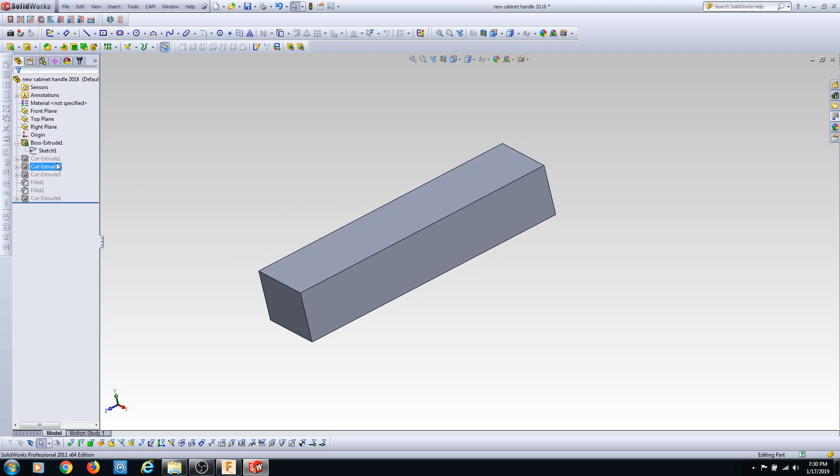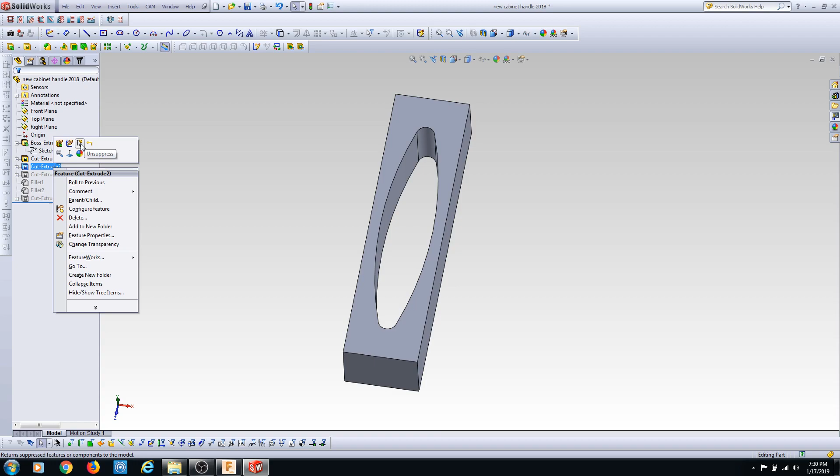So the first thing is, you've got to draw your design. There's some cuts involved, so I won't take too much time, but how I'm designing this is how I'm envisioning machining it too. So when I'm drawing this, I'm thinking about cutting it, how am I going to hold this, and how many of these do I need to make? Do I need to make 20, 30 of them? That's always going through my head at every step I'm doing, from drawing it to actually machining it.

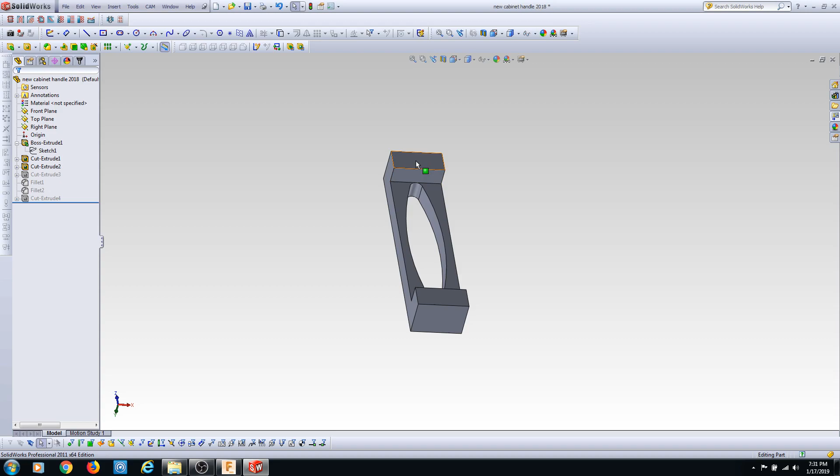So you're already started looking at how this piece is going to be set up on the table, with these vertical cuts and a pocket on the back. So I'd say we already determined that this is going to be the top side of it, and we're going to come through and hog this out in one big board. We're probably going to do this hollow here. Let's look at the next cut. Now we've created a profile, so that's going to be our last cut. Basically, the first cut is coming through and clearing out this section, then the next cut goes through this hole.

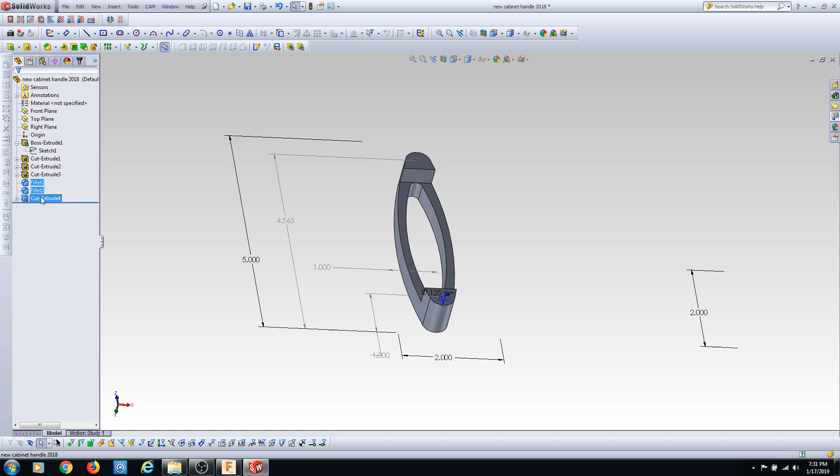There's a couple more things we're going to add here - some fillets. The fillet goes on the top side. We know this is going to be the bottom, and I can't reach that with the cutter, so it's a secondary process - basically setting up a router with a bearing wheel and a radius cutter to make that finish there.

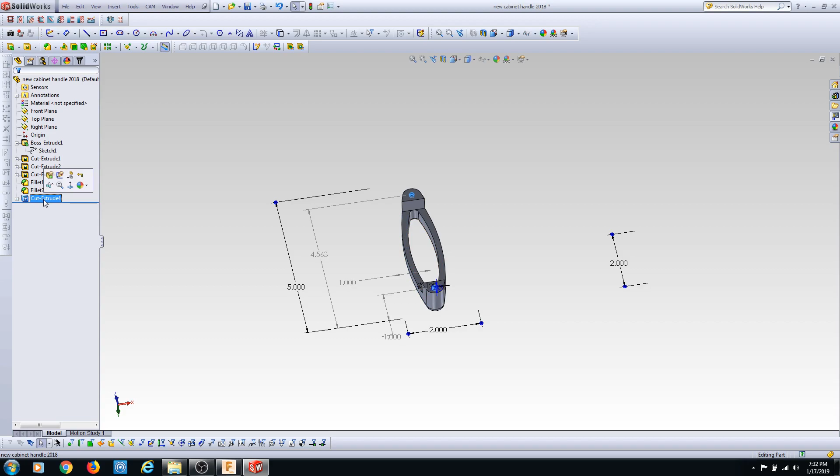Before we do the profile, we're going to poke these holes in. So we can make a jig with that same spacing to lay our holes out on our cabinetry to match, so we know exactly the hole placement. And you can either put thread inserts or drill these to a threaded wood insert, so when you transfer your holes in your doors.

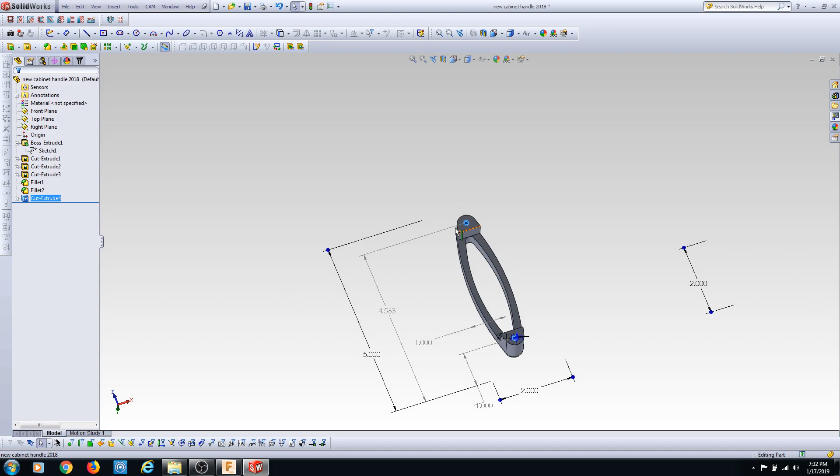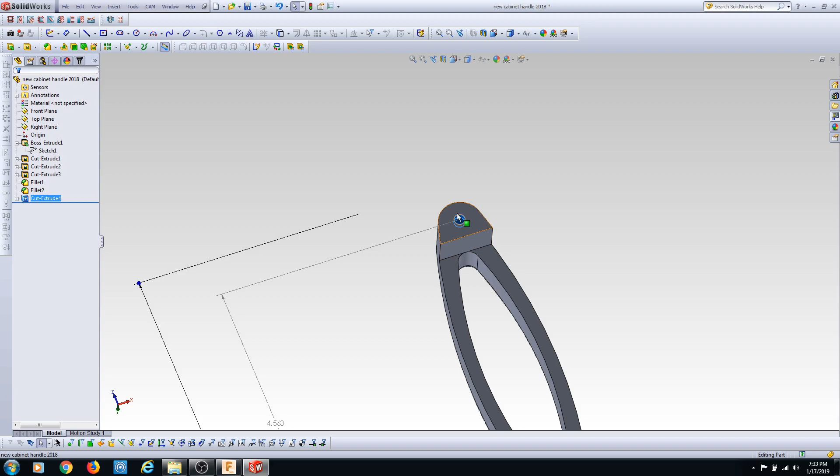What I found was if you didn't put an insert, these areas would split because of using oak or a harder wood. So you probably got to remember to leave enough material here to put a threaded insert for wood in them so they don't crack, because I did skip that step and did crack a couple of them. So I ended up having to drill pilot holes, and that sort of solved the problem, because I'd only center drilled the center points - I didn't really put a tap drill size in there. So I went back and put a pilot hole, and that seemed to give enough relief that I wasn't cracking on the edges. That's how I salvaged that mistake.

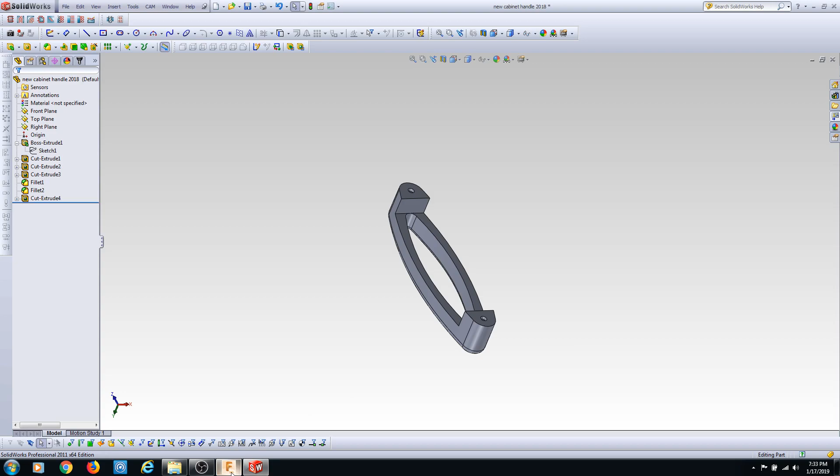So anyways, we've got our basic part drawn. Now we can take this part right out of SolidWorks - because I'm more efficient in SolidWorks, I draw in SolidWorks - so I can pull it right out of there and bring it over into Fusion. Basically what I did in Fusion was start with one single part. Let me see if I can turn these off here. Okay, that didn't do anything, not sure what that does. But I brought in one part and basically copied it multiple times horizontally and then once vertically.

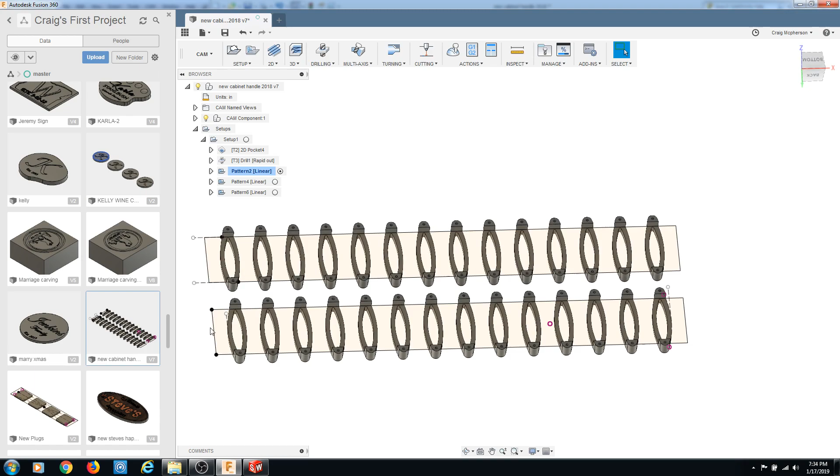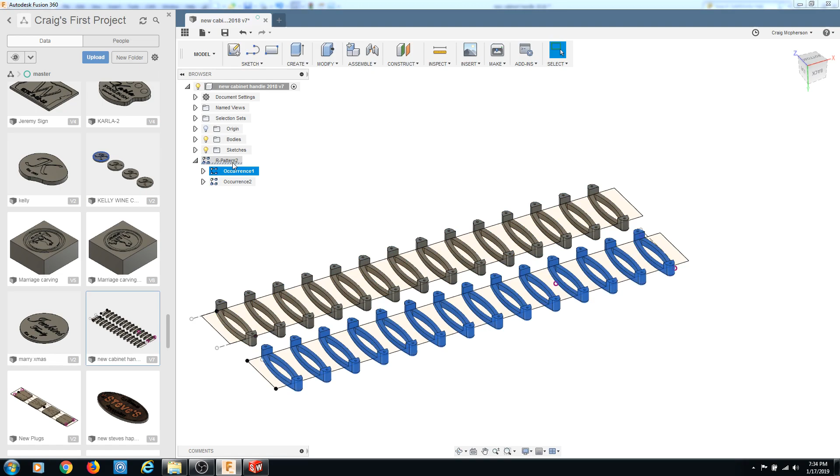So now you're going to start seeing what I did. Because I don't have it drawn as one big board, I had to make some boundaries. So when I do my clearing on this cut, I had to draw a rectangle. All I did was, in this CAM software, it's also got modeling software. So in the model here, I did all the pattern in the modeler, and then here I just drew the sketches. As you can see, if I shut them off, you don't see them. So if you want to look really smart, you can shut those off after you program it, but I usually leave them in there because I use them as points of reference to stop and start my tooling.

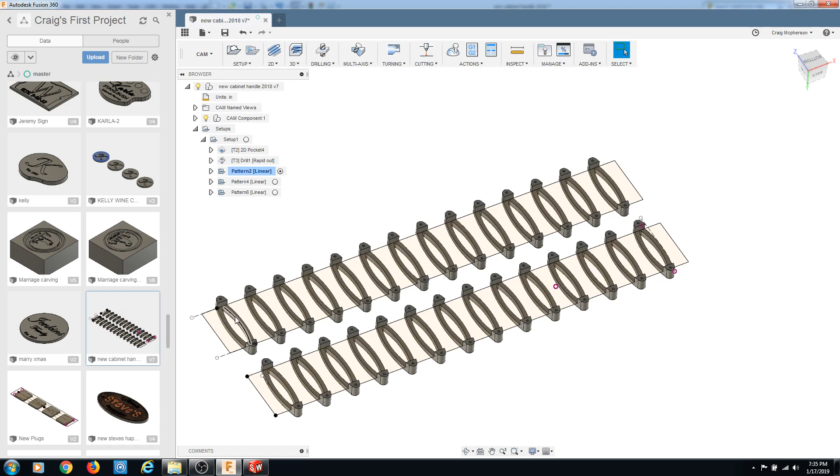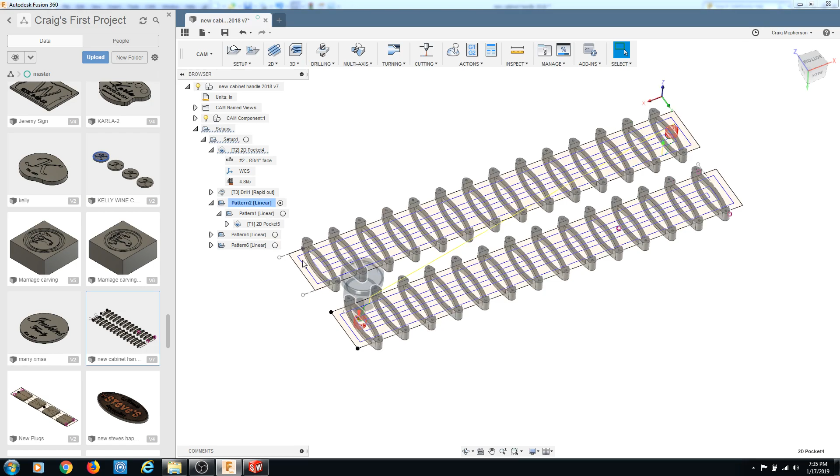So we'll go back into the CAM - that's sort of all my little tricks on how I did that. So now I know that if I program, I can call this a pocket. Each one of these I couldn't call a pocket because they're not a closed pocket. So by drawing this sketch, I created a closed pocket, and I'll be able to show you. So it's a pocket - actually that's the pocket for the center of this cutout. So the actual pocket I was talking about was this. Now when I program this, I can program it as a pocket because I've drawn a rectangle, and that rectangle will be picked up as a self-contained pocket.

And all I'm doing is, in this, let's go up here and we'll edit this pocket.

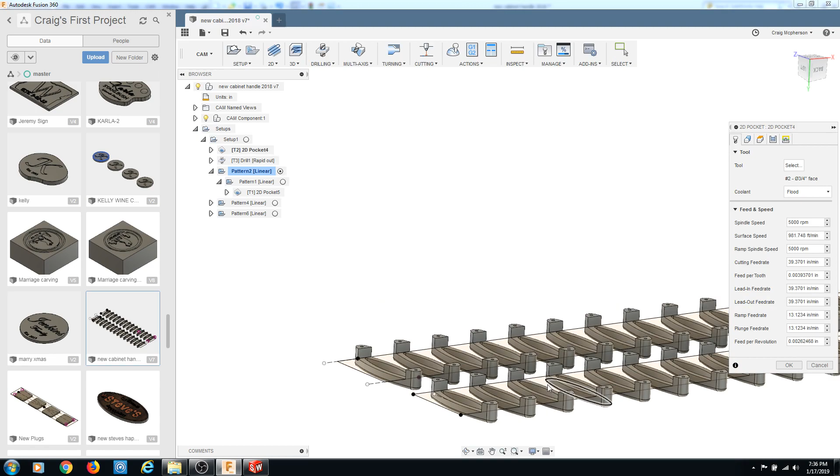So when I pick my geometry, you can see what I picked. I picked those two rectangles, and it's two chains, so that created two paths for my cutter to run for pockets.

For the top height, right here, these are the only two you're really worried about: this top height and this bottom height. I always use model the top, so you've got to zero out your tool. If it's a finished surface, you're going to zero out your tool on this top piece, right on that face. That's what model top means. I use model top again because I want to use the same point as the same datum to create my Z offset.

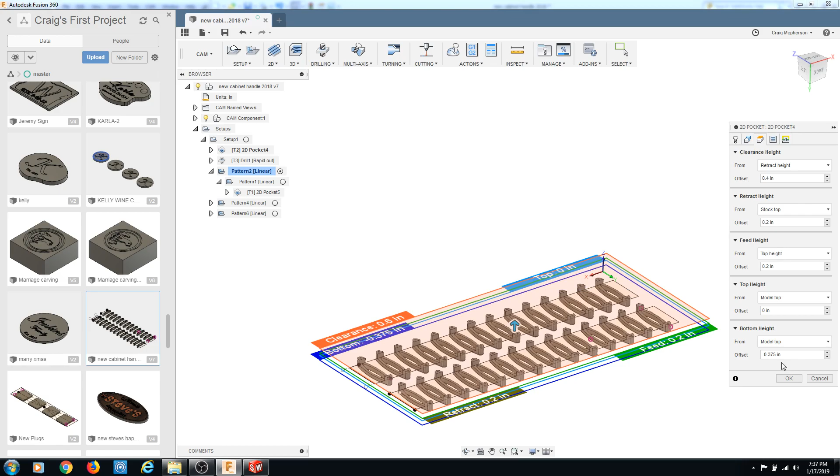So I now want to cut this pocket for your fingers to go in behind this handle, 3/8 of an inch deep, and it's always in a negative direction. And then always doing my conventional cutting.

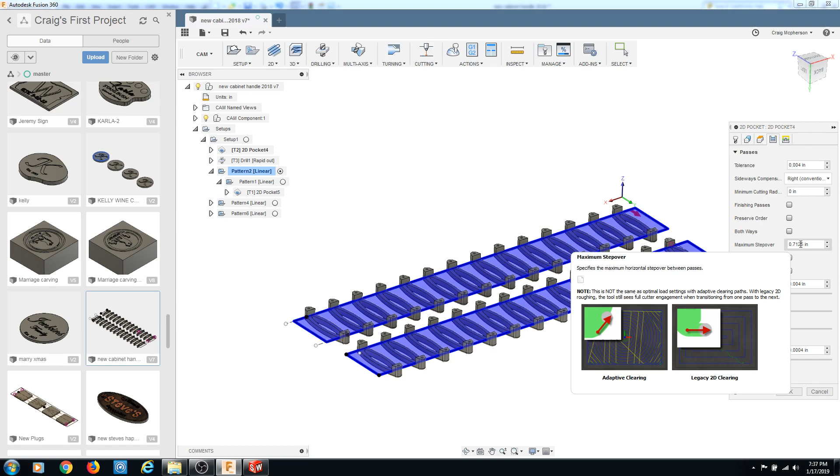The things I mess with - sometimes you'll get better wear on a cutter if you reduce the step over. This one I left it pretty close, and the cutter size is 3/4, so it's a little different.

So anyways, now you've seen that. What else do I want to show you?

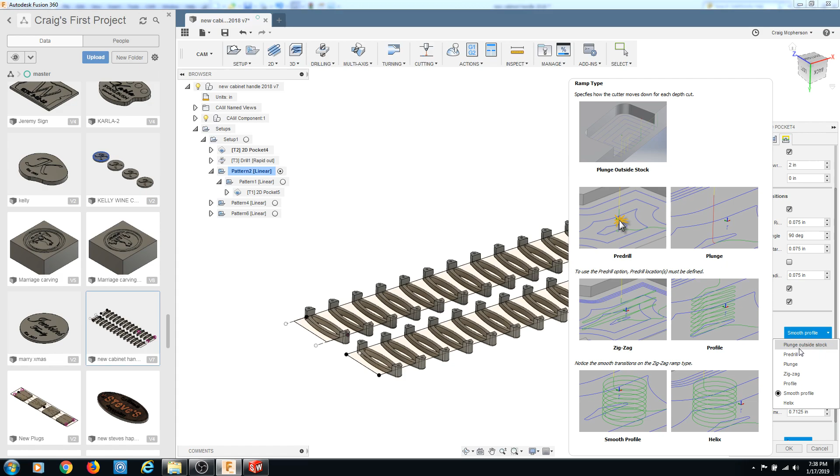Step downs, ramping in - you can do that. I like to do plunge. You could do plunge outside, but I usually just use this plunge here, and then I change it. That's about all I changed there.

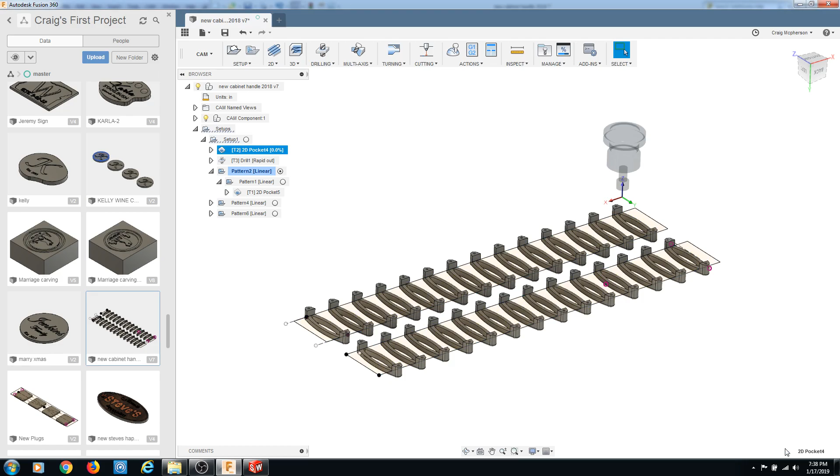I didn't cover multiple depths here. I took that all in one pass because it was one big solid board, but you could change it to roughing step downs, taking maybe 1/8 of an inch at a time. What that does is now I've got 2 or 3 steps in there, so I'm taking 3 cuts.

My cutter - let's go back to where I picked that and how I did that. Right here, select the tool, 3/4 face mill. You can actually left click on it and edit the tool. So here's where you set up your tool lengths, your tool diameter, your flute cutting length.

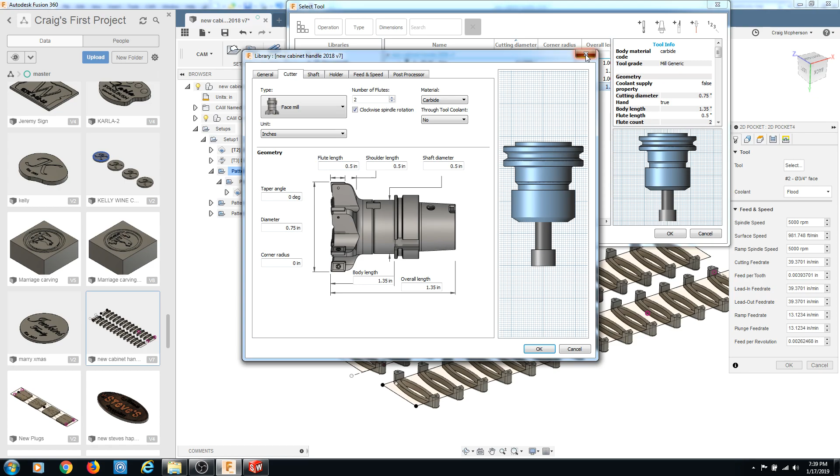I know I got a 1/2 inch of flute, so it wouldn't be no big deal. My router's a 220 router, and it's rack and gear, and it's going to handle this. So I'll go back here, and I'm not too worried about surface finish because it's on the back side.

The one thing that I am sort of worried about are those tabs. If I put too much pressure on there, it would break that - but remember I'm cutting in a much larger perimeter board, so always think of that. Because if I only had just that material and I'd already done some of this work and tried to make that cut, it'd blow those ears right off there. So think about that. In this circumstance, I'd just go a single pass at it and maybe go a little bit slower on my feed. And that's how I would do that.

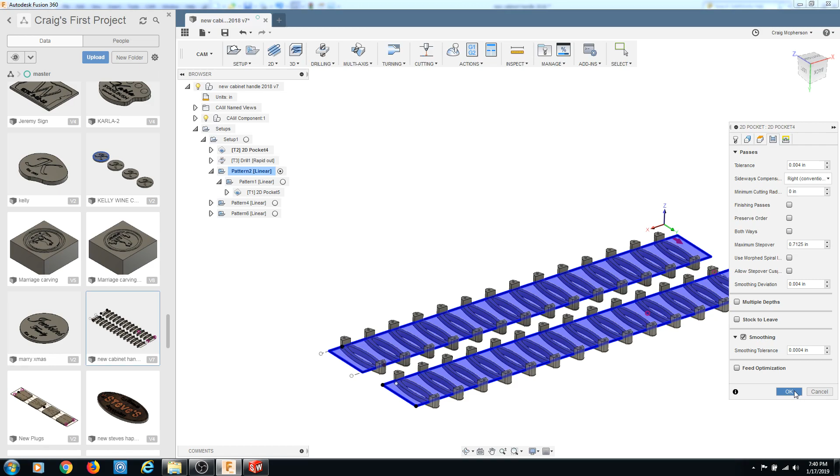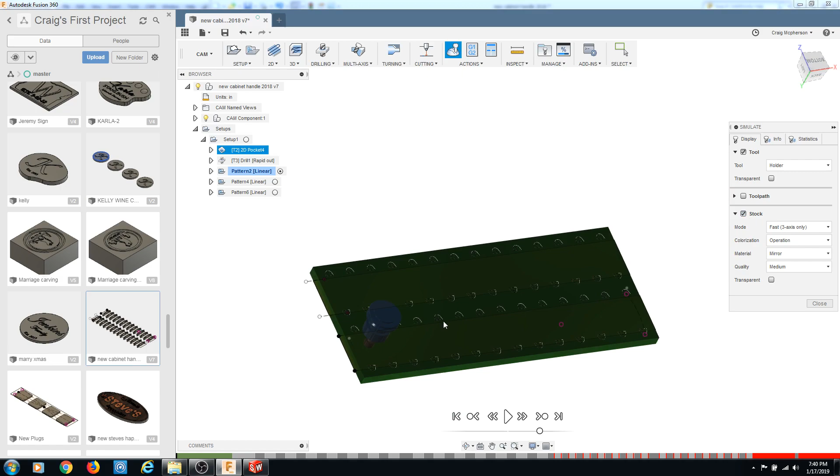And then the rest is basically what this is going to show here. So let's take a look at this. It's got a nice simulation - you can turn the stock on or the stock off. So now you're seeing what I've dealt with, and I guess I sort of missed showing you how I came up with that board size and what drove that. So let me go back.

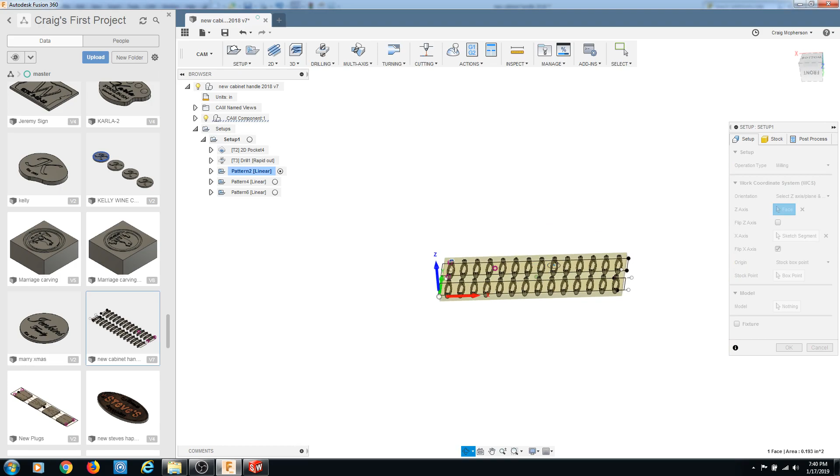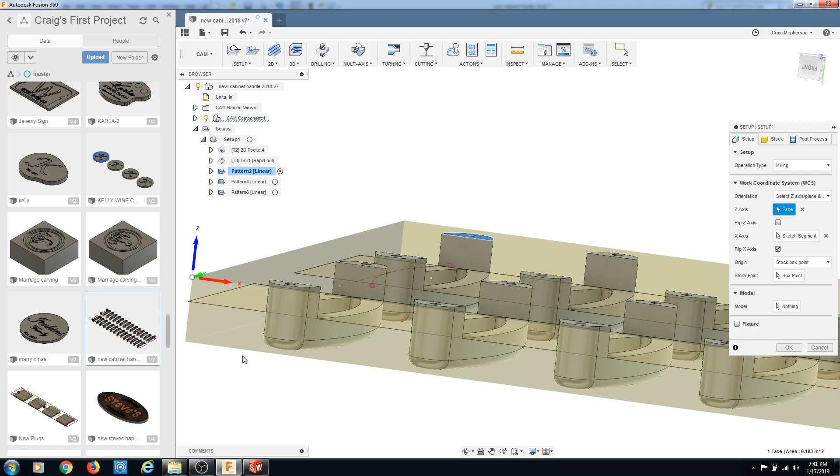The biggest thing you've got to remember is the setup, because this is going to determine how you put your wood in your machine on your x-axis, your y-axis, and your z-axis. If I'm working from the top of my wood like I am here, I'm always measuring the thickness of that wood so I know how far I've got to cut through - if I'm going right to my spoil board, or if I've got something under there I'm going to hit, like a setup block. I'm always thinking about that, and then just like I talked about, how can I hog that out.

Well, if I made my block a little bit bigger, I could hog a good portion of that out, and that can save me a tremendous amount of time.

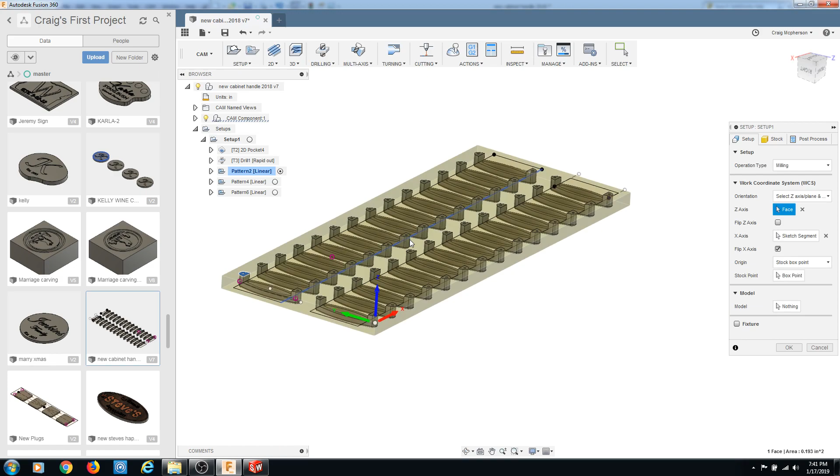I guess I didn't cover how the holes got in there, but you're going to be able to see basically everything. The stock thing here, right here, it's going to show your dimensions. So that's my board, what I've got to rough out my piece, that's what I'm bringing to the table to start: 3/4 inch thick, 10 inches wide by 24 3/4. So that told me what I needed to prep for that setup.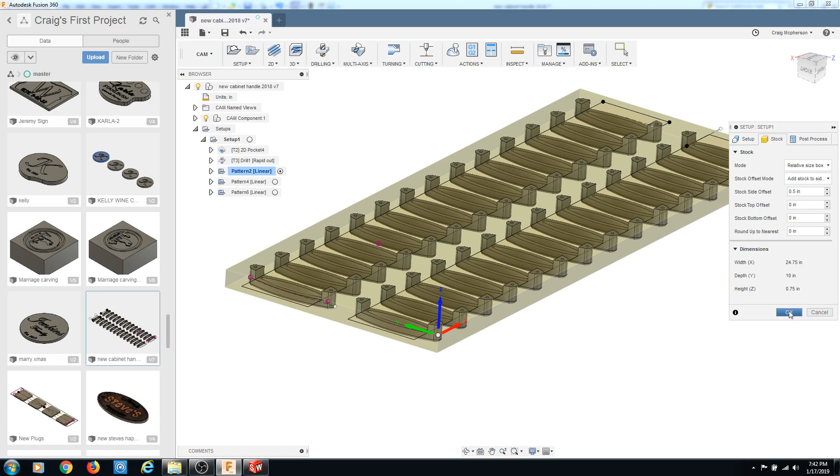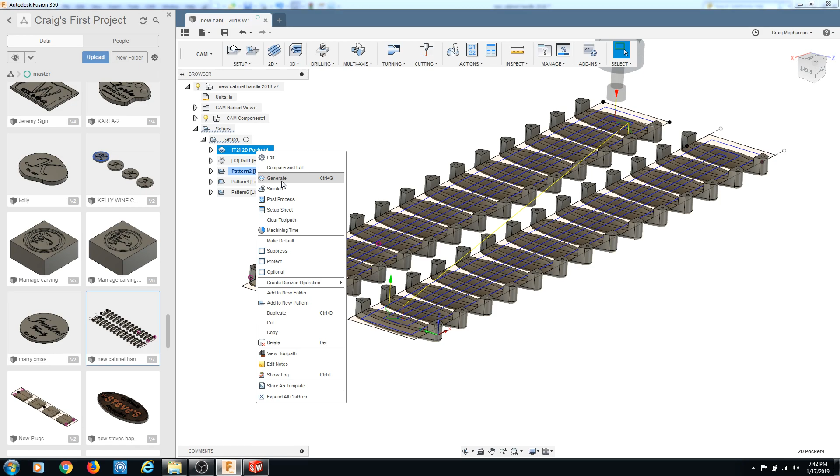As you see, these failed. Sometimes when you're in that setup, it's going to need the tools regenerated. So basically, if you ever see that and it reds out, you've got to just click back on it and generate, and that will regenerate the tool.

To post process. This is the post processor. I always pick milling because that's what I'm doing. I use Mach 3, but if you go in here, there's a lot. What I'm seeing is like the Shark and some of those other CNC machine manufacturers have proprietary software that you can't use Fusion with, and you're forced into V-Carve or whatever the other products are out there, or software that you have to use.

But I'm sure glad I've got Mach 3, because obviously I'm a designer by trade, and this closeness of SolidWorks to this Fusion and the ease of use - I think there was like a quick 10-page tutorial for this Fusion on how to run this cam, and right after I went through it, I was already programming and running my first program. So that's how pretty easy it is.

So back to this, make sure you're in milling. Mach 3 is what I'm using here. Put in the name, so I'm only exporting one cut at a time. This naming convention is always helpful. I always put my cutter diameter, and then it's always good to know how deep you're going.

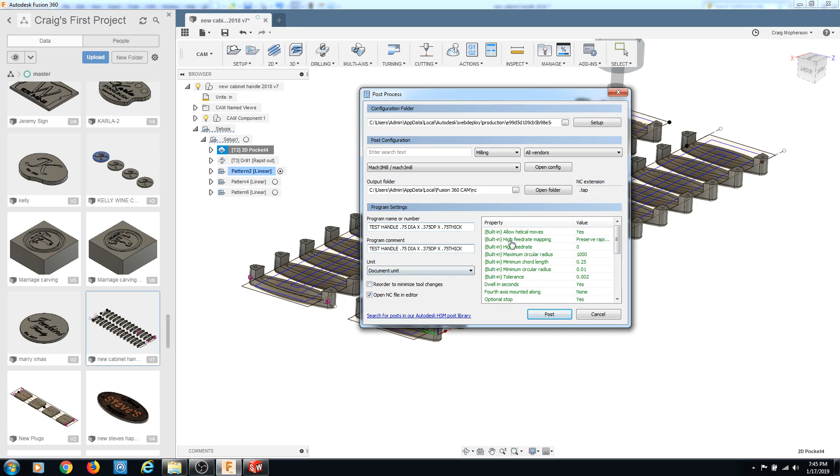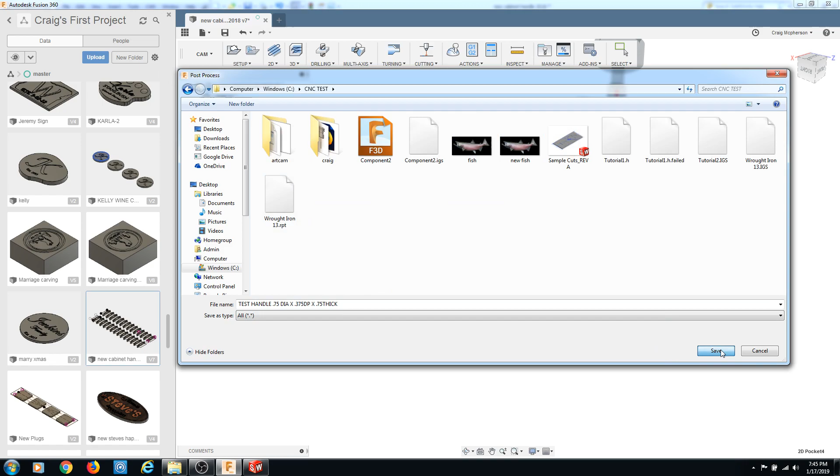And this is what the process or the post looks like. It wants to dump it in this local folder, so you've got to go back and add it to where you want it, and save it. And what it'll do is pull up the editor. What I usually do is isolate code that I don't need. Go in here and just isolate this stuff - that was going to drive my Z up to 0 right at the beginning, and I don't have a limit on my Z, so it would have crashed my computer or my Z travel.

Here there's just the same thing, Z0. So this is wanting to take it back to the table home. Or actually it wants to go back to the Z0 set on the actual program. And then this Z0 here would crash my head.

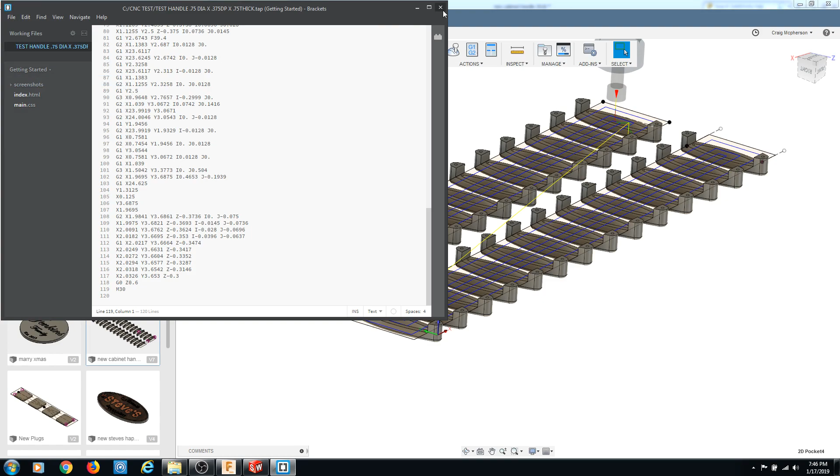So what I usually do, I don't need any of that. I'll let it stop where the last code stops. M30 just rewinds the program. And then I just go back in here and save it, and that's the file there, so let's go look at that.

So it's in here. So there it is, let's look at details, and it's a tap file. So that's what it exported, but it just depends on what programming software you run.

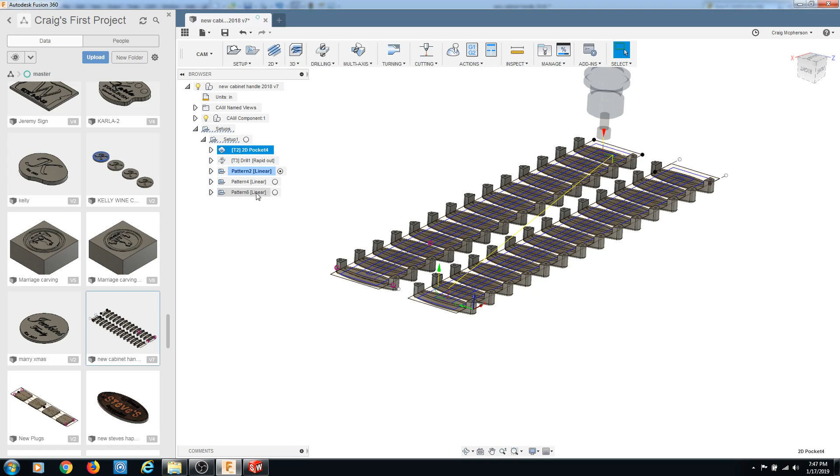So let's go ahead and simulate this and just show you what happens. So I like this simulator because it shows you the cutter, so you can see when you goof up, or if you don't have a small enough cutter for the radius, like in this corner up here.

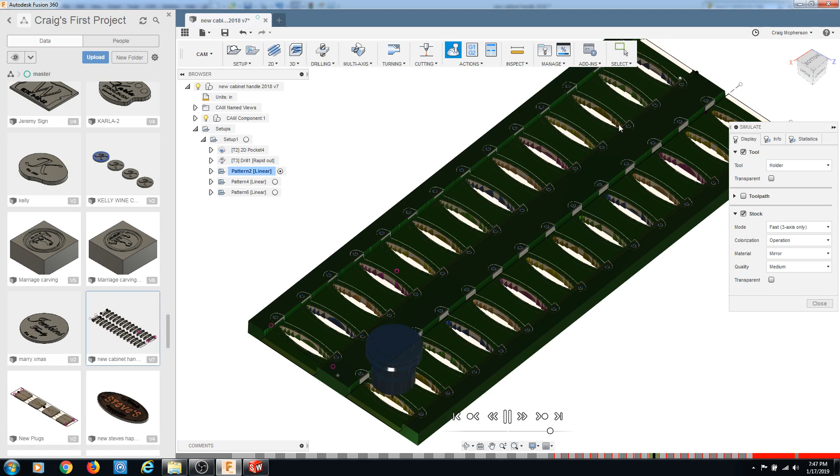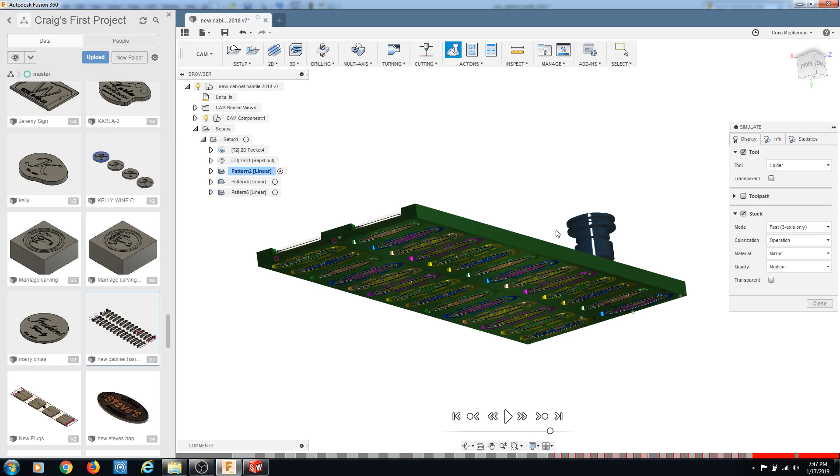So that was telling me, okay, I need to bring in another cutter size. So I dropped down to a smaller cutter here, and that's what I'm doing there, just doing a contour with a smaller cutter to get a tighter radius in the corners. And then I'm doing my profile with tabs, so you're seeing the tab connection. All I used was just a little Dremel vibration tool to cut the tab up, made a little jig for my small router and put a bearing radius bit in there, and zing zing, I was done with it. So there's just a quick tutorial on how that works.